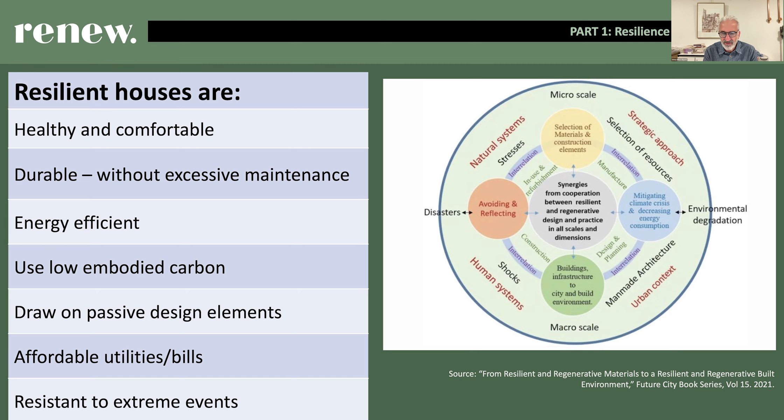The reason why we think embodied carbon is really important in our homes is that it's a really easy way to reduce our carbon emissions. So at the time that you're building your house, if you're choosing low embodied carbon materials, it means that you're doing a much better job for the environment.

Then there is operational carbon, which is essentially how much it costs to heat and cool your home. And if you have an energy efficient home, it generally means that less money needs to be expended on your gas and electricity bills. So there's a benefit to your financial well-being if you have an energy efficient home.

The fundamentals of passive solar design. Passive solar design is a concept that's been around, as I say, for about 30, 40 years, probably even more. And it essentially is using the effects of summer and winter sun and the fact that the sun rises in the east, during midday it's in the north, and sets in the west.

Generally speaking, in summer the nights are cooler. Generally, in winter, the sun angle is much lower, which means that we can get our sun penetrating into the living rooms much more easily. So we're essentially trying to use the natural cycle of day and night, summer and winter, spring and autumn.

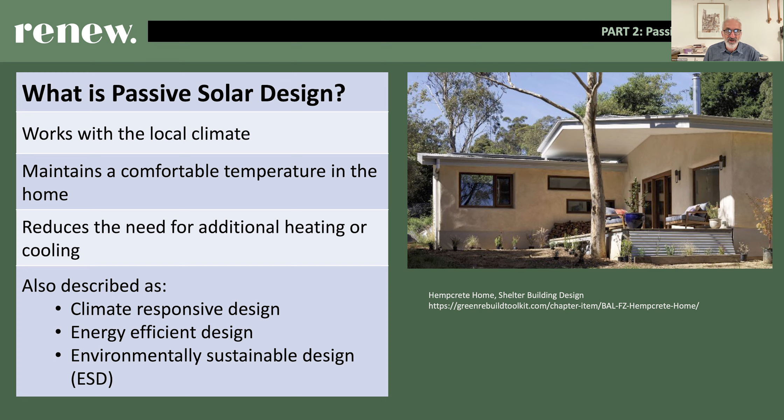Okay, so ESD. So generally speaking, we orient our buildings to the north, the living rooms to the north, so that we can get that nice warm winter sun when it's generally colder. And by having an eave overhang, we can exclude that really hot summer sun and keep our houses much cooler.

The benefits of a passive solar design are that health and well-being are improved, because essentially we've got a home that is responsive to the climate, and we're reducing our energy costs.

The main principles are that we're using passive solar heating and cooling for our homes, and we're using thermal mass. So I'll just talk a little bit about thermal mass.

So in winter, if you've got, say, a concrete floor in your home and that winter sun is coming into your home, that energy that is being gained from the sun during winter is actually heating up the concrete or brick wall and can re-radiate back into that space at night. So thermal mass is a really important consideration when we're talking about passive solar design, because it's essentially storing the energy that's coming in from the winter sun and re-radiating that heat back into the living spaces.

Glazing is really important—not having too much glazing to the east and west, because generally speaking in summer we're getting a lot more solar heat gain from those areas. So the amount and type of glazing we put into our buildings is really critical. There's been a lot of advances in glazing technology, like low-E glass which excludes the summer sun, double glazing, triple glazing, and much better window frames than we would have had 20 or 30 years ago. We're getting high-performance glass and windows, which makes a big difference to how our buildings function.

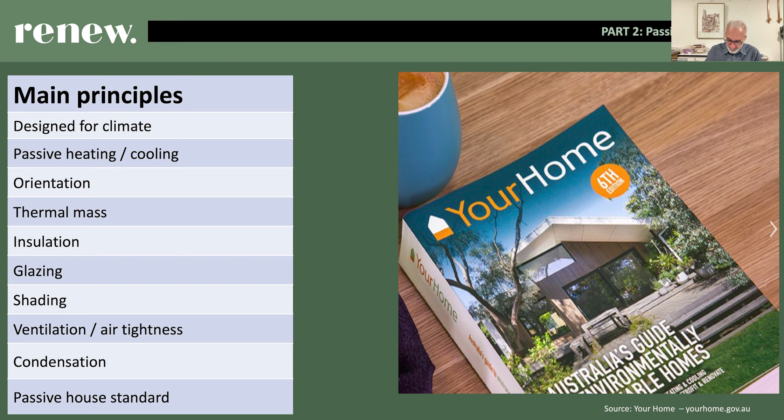It's important to understand that in Australia we have 8 climate zones. Generally speaking, in the south of Victoria we have essentially 2 or 3 zones—an alpine zone and an arid zone up into the north of the state. But generally in the areas this webinar is addressing, we've got a fairly temperate climate. We actually have a very good climate in the south of Victoria, in the sense that it doesn't get so hot and it doesn't get so cold. I know lots of people like to complain about the weather, but in reality we have a really good weather system in the places we live. So it's very easy to design homes with a connection to the outside, without having to deal with really severe cold or hot conditions. That puts us at a distinct advantage.

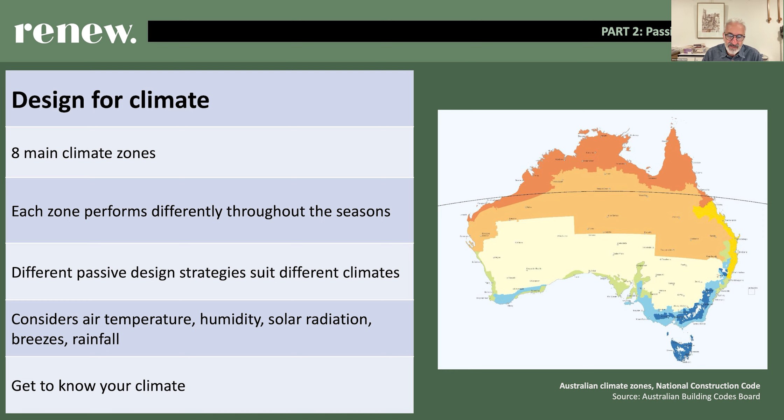But each zone we're designing for is different—if we were designing in Darwin, Queensland or Western Australia, the type of design would be different for each state. A good way to understand design for climate is just looking at your local area, looking at what buildings actually work and what don't. Buildings with eaves, buildings that don't have huge amounts of glass—about 30% of the wall area, no more, should be windows. The size of the house, the orientation, and the landscape make a big difference to how we respond to climate. Understanding humidity and the amount of solar heat gain in summer and winter is really important when designing for climate. Generally speaking, good architecture is architecture that responds to the climate.

That means the sun can penetrate into our space much more easily. We want that winter sun to come into our buildings because it heats the internal space. We're getting free heating from the winter sun, and we're excluding that hot summer sun in the summer months.

Orientation is really important. Generally speaking, we orient our buildings with living rooms to the north, and we try to have as few windows as we can on the western side. As the sun sets in the afternoon, the day has heated up quite a lot and the air temperature has heated up, so the summer sun can really have a big impact on how much heat the building gains once we hit the afternoon.

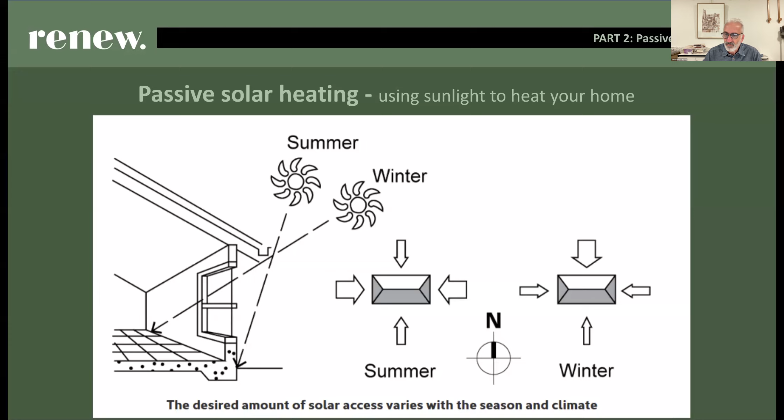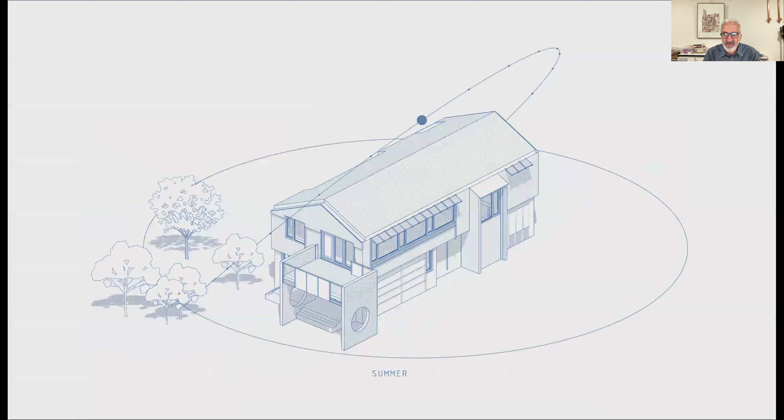This is a little diagram that shows the sun moving around a building. By applying sun shading around the building and orienting the windows in a specific direction, we can have a big impact on how much solar gain we get from the sun during summer and winter.

Passive cooling. Essentially what we're trying to do is increase the heat loss during the cooler part of the day. A really simple way of thinking about passive solar design is just using the effects of day and night and season to design buildings that are responsive to those conditions.

We know it's hot in summer but it cools down at night. So the easy way to cool down a building naturally is to allow it to ventilate. Generally, in those 7 or 8 hours of nighttime, opening up the building as much as possible allows hot air to be flushed out and cool air to come in. Then you essentially close the building up during the hot part of the day to keep that cool air inside for much longer.

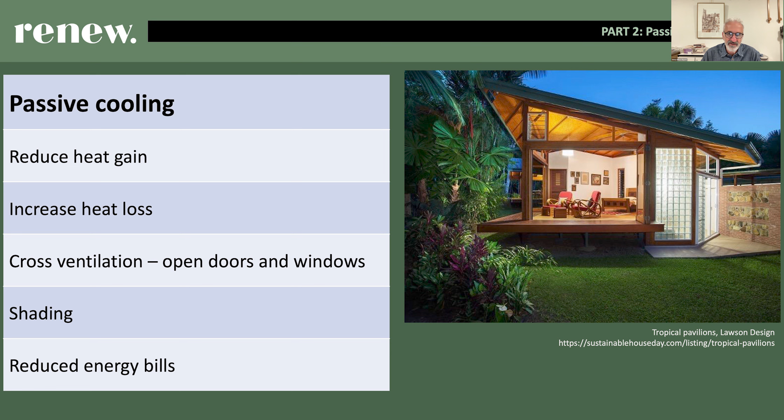Cross ventilation is really critical, as is shading, because shading prevents solar heat gain during the hot part of the day. What also goes without saying is having really good insulation in your building, because insulation prevents heat loss and heat gain during summer and winter.

Orientation is absolutely critical, as we were talking about earlier. We tend to orient living rooms to the north and bedrooms to the south. Wind conditions do vary - generally in Victoria, the cooler breezes tend to come from the southwest, and the hot, more desert air comes from the north and west, so those particularly hot, dry winds come from there. In truth, wind does kind of move around the building somewhat, but the weather tends to come from specific directions.

Typically, we organise our buildings so that there's a deeper eave or pergolas to the north, so that we can exclude that hot summer sun during the middle of the day in summer.

It's really important to understand that you may have a block of land or a building that isn't ideally oriented for passive solar design, because of how subdivisions work, or the previous designer didn't take these principles into account. That by no means suggests you've got a bad building - it just means you have to work a little differently. For instance, if you have a house oriented to the west, that's not ideal, but there are sun shading devices and vegetation, landscaping treatments that can help mitigate against that really hot westerly sun. It's not a one size fits all - you can make any orientation work for you, in truth.

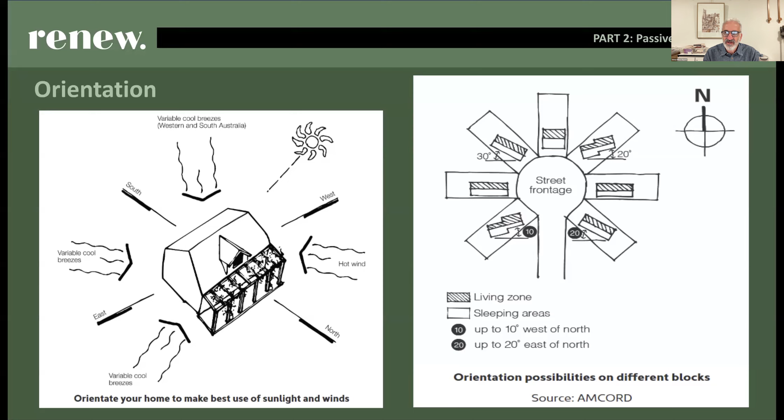But in classic passive solar design, it is that north orientation that makes the world of difference.

So this comes back to designing buildings and gardens together. In a lot of newer estates, we're seeing much bigger buildings on smaller allotments, which isn't allowing us the same garden opportunities that we once had.

It's really important when designing buildings to include landscape design in the overall project, because landscape increases the energy efficiency of a house no end. If you've been in an open car park or shopping centre with no trees, the effect of the heat is really pronounced. Whereas in a park with shady trees and shrubs, nature's ability to absorb heat is incredible. It also has a real psychological benefit, as we generally feel a lot better surrounded by nature. So when designing buildings, we want to incorporate landscape as much as possible.

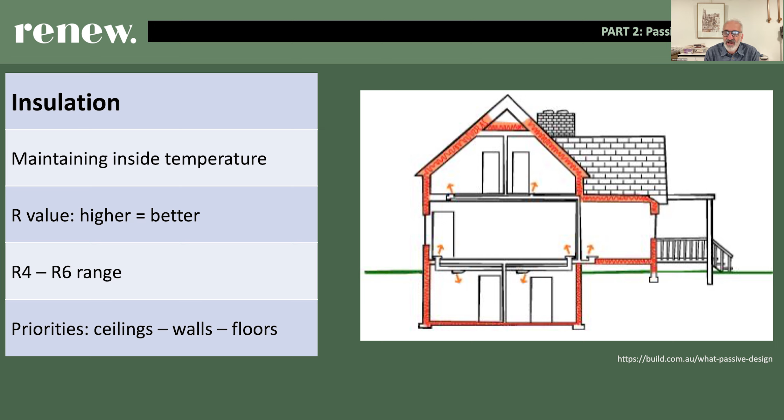We measure insulation using the R value - the higher the R value, the better. You can get R1, R2, up to R7 in blankets, with varying qualities readily available. The big advantage of insulation is that once it's in your building, it's there for life. You're not having to do anything else for it - it's quietly working away, keeping your house warm in winter and cool in summer, so you don't need to run the air conditioning nearly as much. Good insulation is absolutely essential in a well-designed, sustainable house.

Thermal mass, which we touched on earlier, is a really important principle to understand. In simple terms, if you put a brick outside and the sun heats it, it absorbs energy, and as the day cools, that energy re-radiates back outward. If you've walked past a brick wall in summer and touched it, it's really hot - that heat is stored within the bricks.

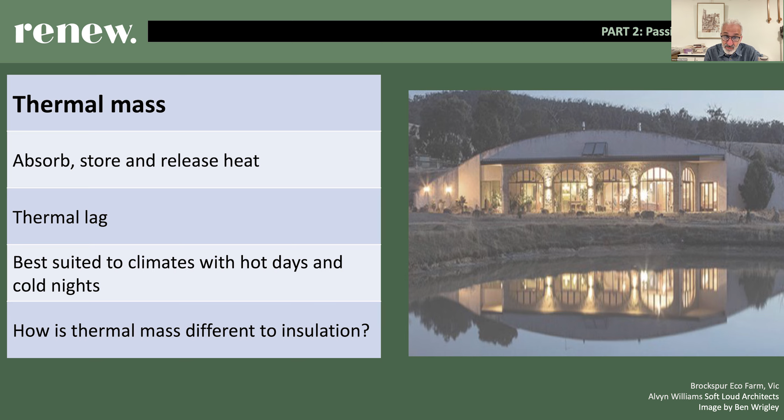We can use thermal mass in our buildings, typically in concrete floors and masonry or brick walls internally, to absorb winter heat and re-radiate it at night. That's referred to as thermal lag - we want to capture heat in the middle of the day in winter and let it re-radiate into the space at night.

Glazing we touched on earlier. Having been in the building industry for some time, the advances in glazing and window technology are phenomenal. It does cost more to get well-designed windows, no question, but the benefits are amazing. In an older house with single glazed, cheap aluminium windows, you've more or less got glad wrap around the opening of your building. In a well-designed house with good windows, they really perform their role in keeping heat in during winter and excluding heat during summer.

That happens because we've got much better glass technology. There's a thing called the solar heat gain coefficient, which is the glass's ability to exclude summer heat gain, especially with double glazing that's vacuum sealed - meaning the double glazing provides an insulating blanket between inside and outside.

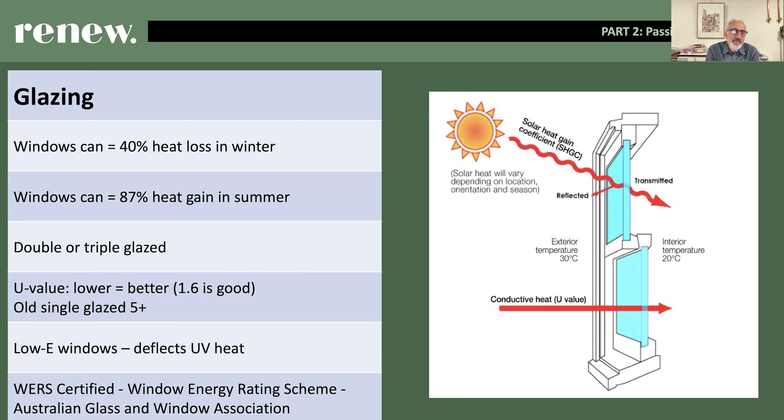Unlike insulation, we measure the performance of glazing using the U value, which is actually the inverse of the R value - the lower the U value, the better the glazing system. You want good glazing and good window frames in your building because it makes such a massive difference. Windows and glazing are typically the weak points of your building, so the better designed they are, the better your building's performance will be.

So ventilation and air tightness. As I said earlier, it's a bit of a contradiction because in some ways we want our buildings to be well ventilated because that's how we get fresh air into our houses.

Historically our buildings in Australia are very leaky—exhaust fans, air vents, downlights, chimneys, the construction method generally leads to a leaky space. It's like wearing a jumper full of holes. By having a leaky building, you lose the heat from your heaters and the cool air your air conditioner puts in during summer. All that air is essentially escaping.

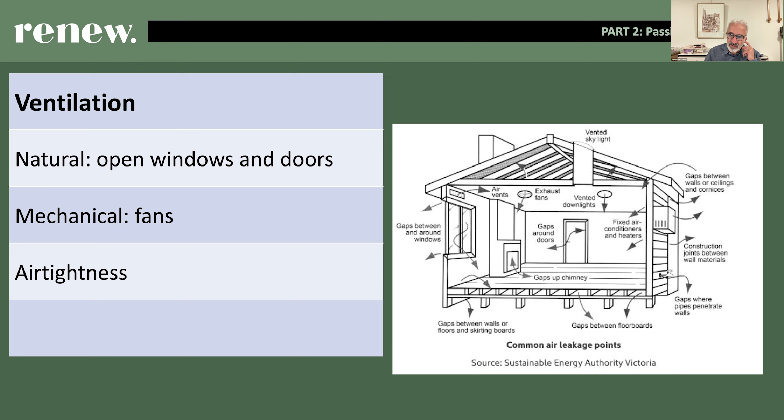One issue that's emerged with better environmentally designed buildings is that condensation can arise in a building that's really well sealed and where we don't have much daylight and sunlight. We have to manage that, and have good knowledge about how to do it.

The principle is that warm air has the ability to hold more moisture. When that warm, moist air comes into contact with a cold surface, condensation can occur, and we get moisture forming on the inside of our buildings.

That's the thing we're trying to avoid at all costs, because when we have moisture on walls, curtains, or glazing, the opportunity for mold can occur, and that creates an unhealthy building.

So ventilation, daylight, sunlight, and buildings that separate the inside from the outside as much as possible prevent condensation from occurring. This is particularly an issue with apartment buildings, where we're not getting daylight and sunlight deep into the spaces, managing this issue.

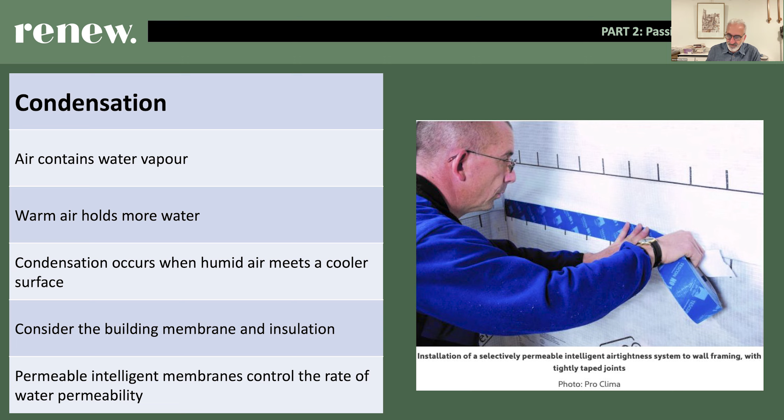Let's talk briefly about passive house. Some of you may be aware of it. It's a bit confusing because we've got passive solar design and passive house—two words that are quite similar, but also different.

Passive house is a standard that essentially emanated from Germany in the mid-1970s, again in response to the oil crisis of that era. It came about through an institute of engineers, architects and so forth, who worked out that if you insulated a house and made the building very airtight and enclosed, you would require much less heating and cooling within that space.

The principles are very much aligned with passive solar design. However, it raises the bar ever so much—you're effectively getting a building that is a much higher performance building than with passive solar design alone.

There's certification involved—a whole lot of computations have to be delivered to the Passive House Institute to demonstrate that you've achieved the efficiency regarded as a passive house design.

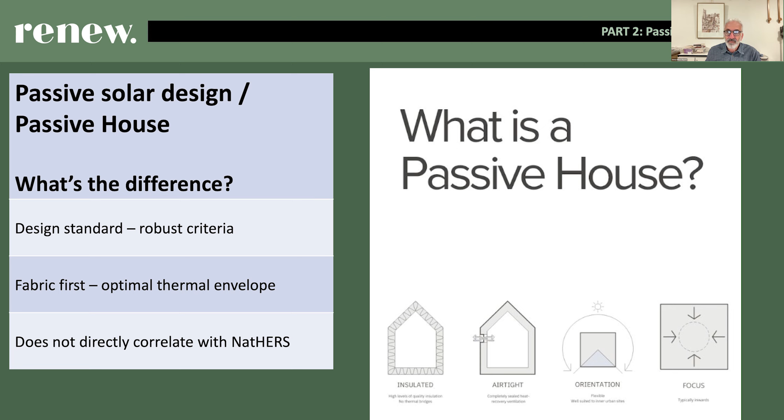Passive house mandates that you have a ventilation strategy of continuous fresh air. It does this through an air exchange system, which transfers whatever warm or cool air you have inside the house through a heat exchanger and brings fresh air into the space.

It means that in a passive house design, you've got continuous fresh air coming into the house at the right temperature.

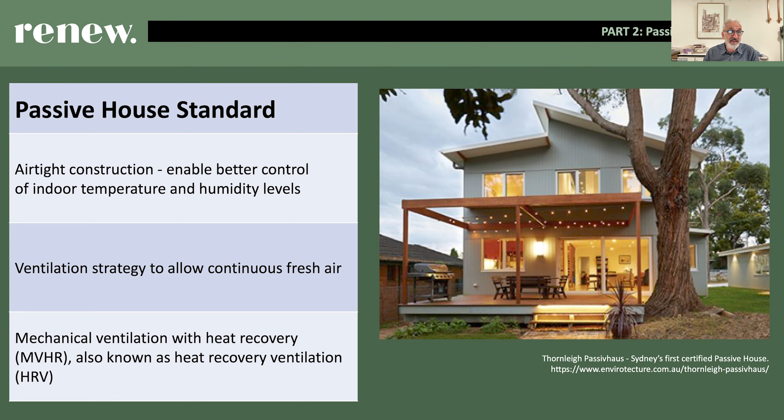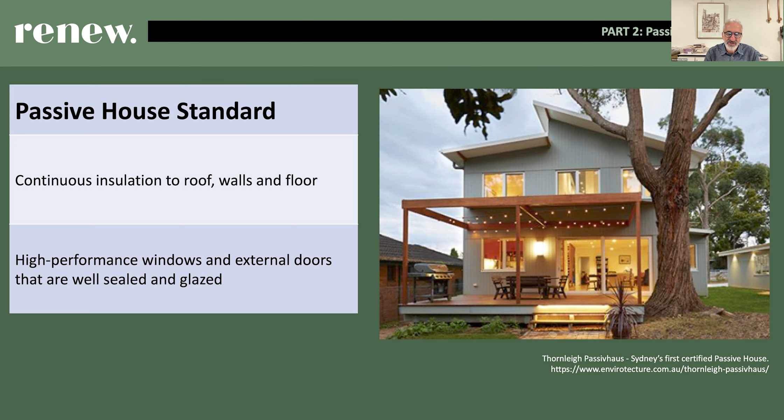Again, it's lifting the bar much higher than passive solar—you also have high performance windows and external doors that are extremely well sealed and really well glazed. A key feature of passive house is that all the modelling is done at the design stage.

You have to submit your energy modelling to the Passive House Institute to verify that you meet the standard of passive house. Then, once it's built, you have to do testing to prove that the construction and performance of the building meets the criteria of passive house. So it's setting a much higher standard for the design of the building in order to meet the criteria of passive house.

Passive house is becoming a very popular design approach in Europe, in Japan, in England, and New Zealand, and it's becoming increasingly more popular here in Australia. I think next week there is the Passive House conference, their annual conference that is growing. The number of suppliers meeting passive house standard is growing, and the number of passive house tradespeople out there are growing. So it's something you'll definitely hear more of in the future.

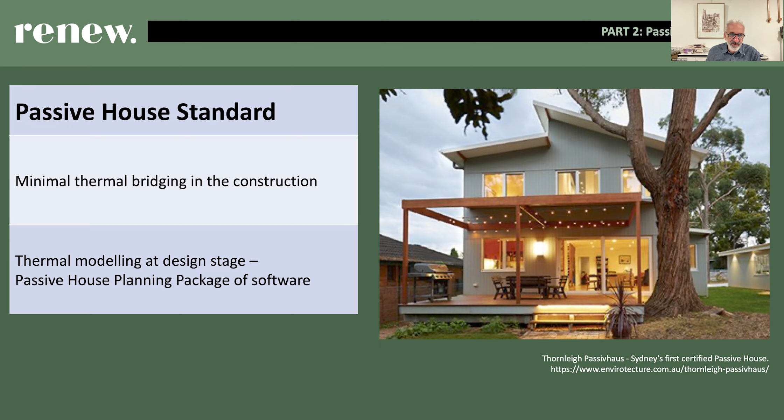I suspect many of you on tonight's call are already in a building, so resilience through retrofitting is probably more relevant to you. It's really important not to think of a building as something you design, it gets built, and then you set and forget. A building is no different to any other asset in your life, whether it be a car, a bicycle, a piece of computer equipment. It's about how you use the building, how you maintain it, how you repair and improve it.

Essentially, all buildings need to be maintained, and to some extent a budget needs to be allocated every year for maintenance of the building, whether it be repainting, cleaning gutters, changing windows, making the bathroom more accessible, a whole range of things. So the more we maintain our buildings, the longer they can be retained, and the less likely they are to be demolished.

If you go for a walk in your local area and see buildings that are properly maintained, with their gardens and grounds and the buildings themselves, often they're the ones that attract a better price when they come up for sale. But they're also buildings that don't require as much cost in the long term because they're being continuously maintained over a long period of time. So behaviour is really important, and the way you use buildings is really important.

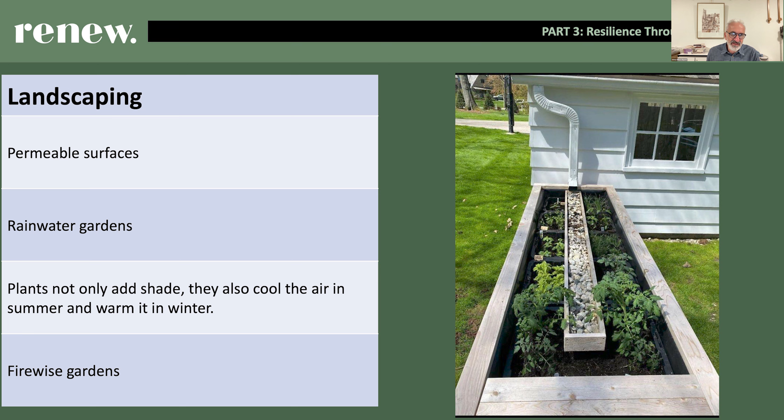The reason we want permeable surfaces, and this comes back to having buildings with a smaller footprint, is that we don't want stormwater running off our buildings into the stormwater system and into our rivers and streams. We want to delay that process as much as possible and use that water in the ground to create a more fertile landscape. So much of our cities now are sealed with asphalt and concrete, so any opportunity to create permeable landscape around the building is really important, because it means water isn't being flushed down the stormwater system and into our river systems.

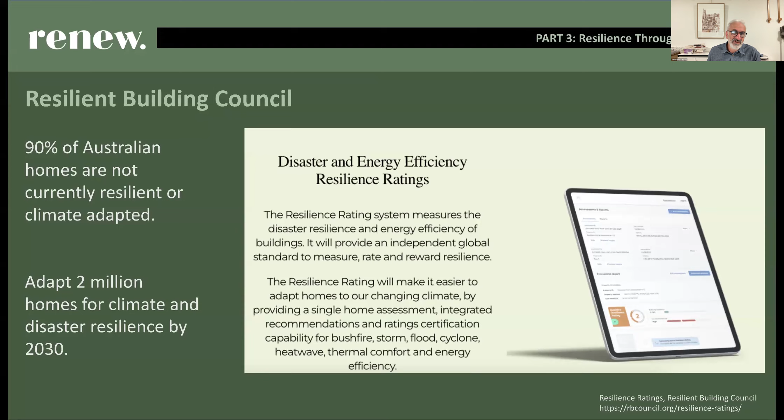I think it's fairly simple to say that a lot of our homes are not climate resilient or climate adaptive. We've got a lot of work to do in this area. Every time there's a bushfire, a flood, a storm, we hear in the news how our buildings are being damaged. There's only so much we can do, to be honest, but it's really important that we give consideration to these things as much as we can.

Resilience to extreme events - it's a bit harrowing, but we are more prone to heat waves, drought, bushfires, damaging storms, strong winds, floods, humidity and mould, and rising seas. I'm not one to be doom and gloom, but we are seeing these events more apparent, and I think all of us have a responsibility to do what we can to make our buildings more resilient as much as possible. The recent fires in LA - those buildings that survived, those that didn't, often came down to luck and design.

But it is interesting when you reflect on what can be done in order to salvage what we have. I think we all play a role, we all belong in a community, and we all need to do our bit in relation to these things.

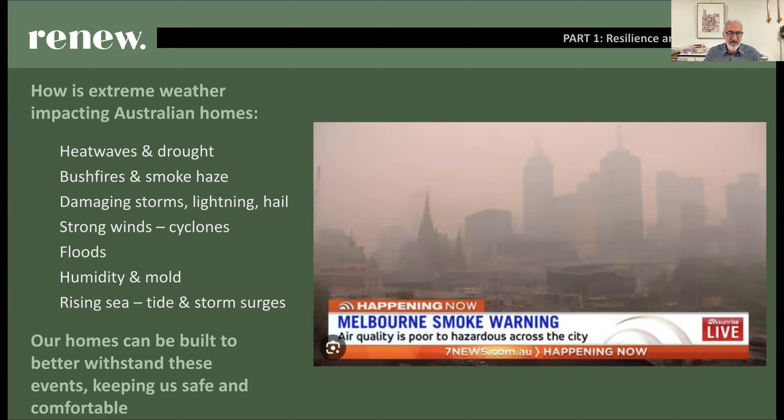Resilient homes have the potential to save costs in the long term, and potentially retain a house that we can live in. Insurances - if you're reading the local press, you'll read that some houses are becoming uninsurable, some places are not insurable anymore. So the choice of home that you make, the location of home that you make, I think are really critical. It just means your home is being adapted to changing conditions.

We are very aware of bushfires here in Australia. Ash Wednesday, Black Friday, all of these days where we've had major events in and around our communities, highlight the need to create houses which are bushfire resilient.

We have what we call a BAL rating in all of our cities and country areas, so architects and designers have to design buildings that respond to the BAL rating. BAL is short for bushfire attack level. If you're in an open area with not many trees or much grassland, you're generally in a low fire zone. If you're in a forest, you're generally in a much higher bushfire attack level, and the design has to respond to that.

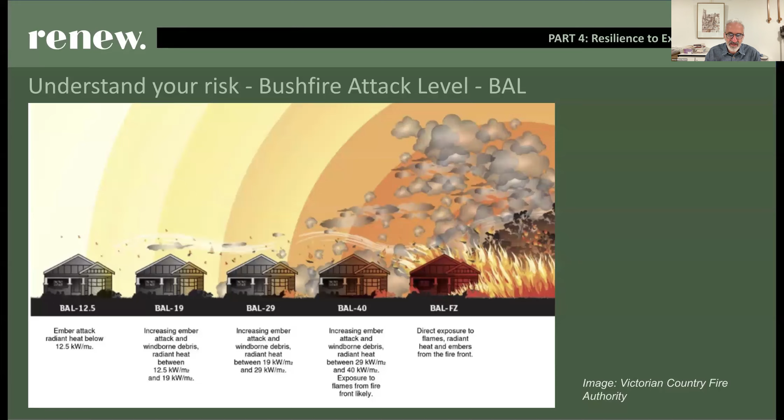Where I live in Thornbury, when we first moved into the area about 22 years ago, there was a flood because the stormwater system didn't work. And the impact of flood is quite devastating, because it comes in at a low level and can do enormous damage to a house. Carpets, furniture, electrical equipment, all of that stuff gets really badly damaged.

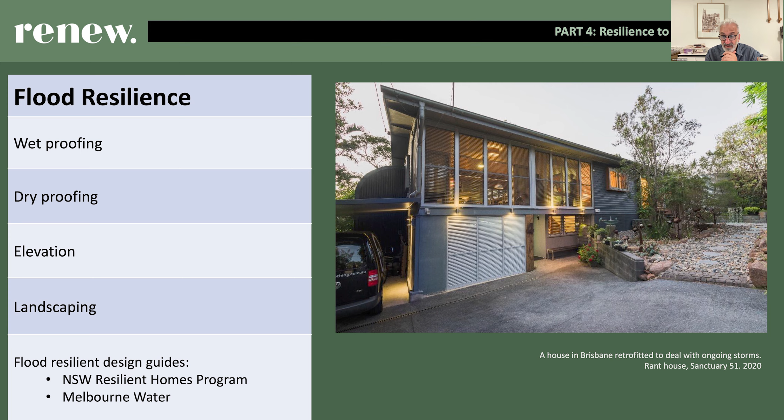So the design of the building, and generally speaking, there are flood zones which are given to us through the local authorities as to what level we need to design our buildings for. Being conscious of how your building will perform in a flood is really critical.